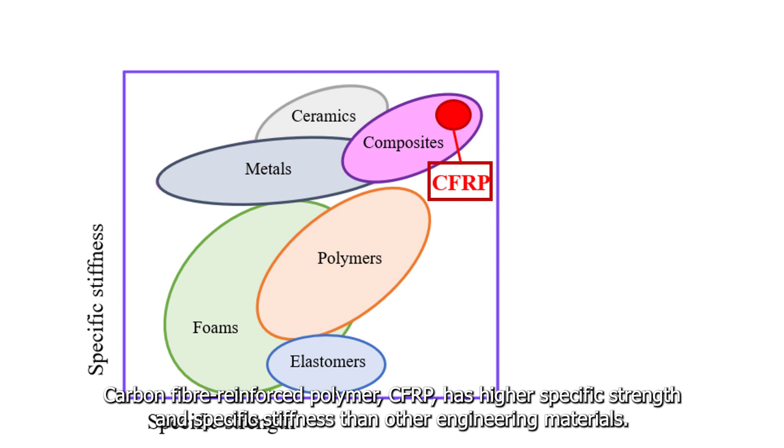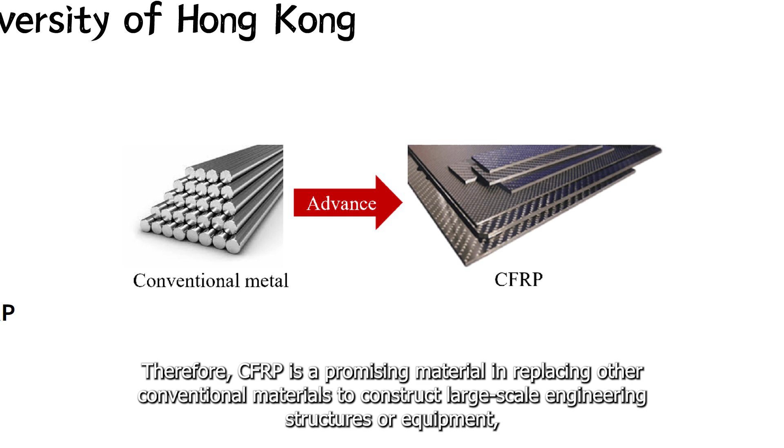Carbon fiber reinforced polymer (CFRP) has higher specific strength and specific stiffness than other engineering materials. Therefore, CFRP is a promising material for replacing conventional materials in constructing large-scale engineering structures or equipment, increasing the working efficiency of the whole system.

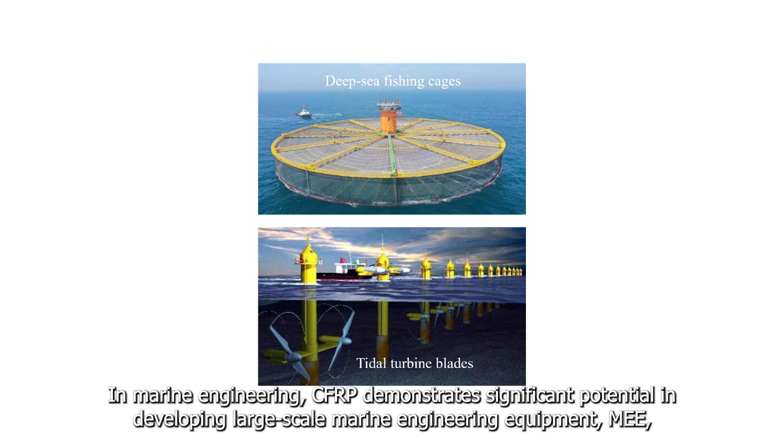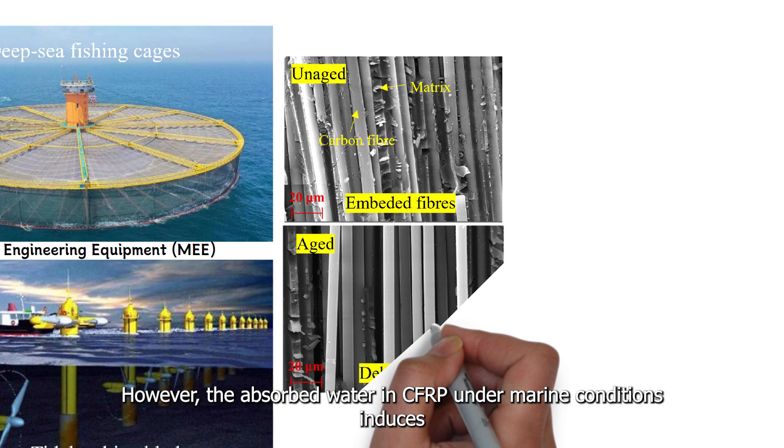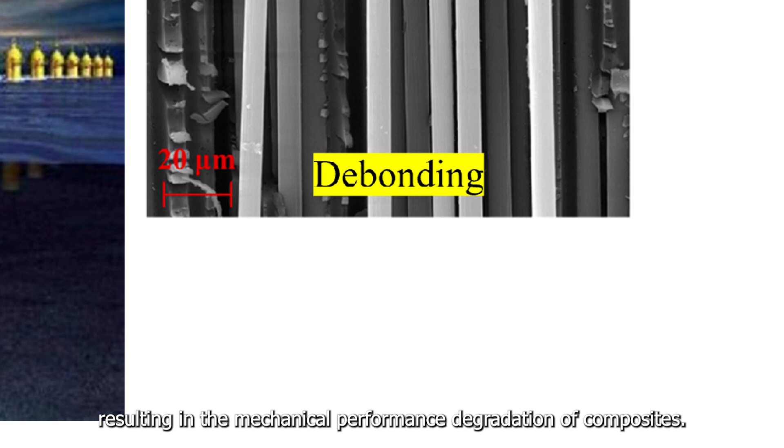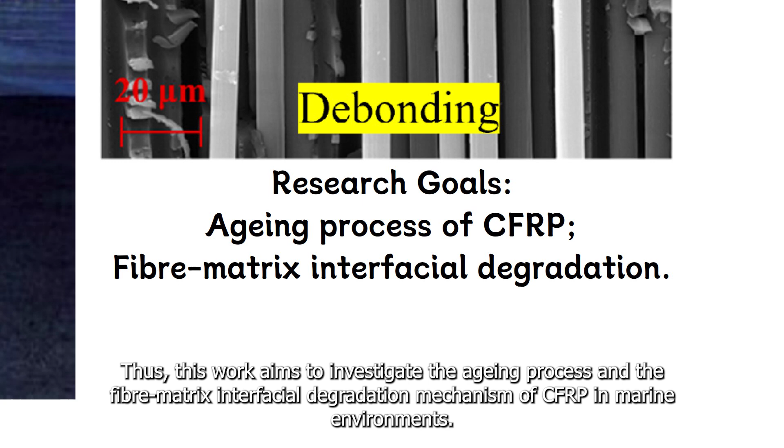In marine engineering, CFRP demonstrates significant potential in developing large-scale marine engineering equipment (MEE), such as deep-sea fishing cages and tidal turbine blades. However, absorbed water in CFRP under marine conditions induces interfacial debonding between carbon fibers and the resin matrix, resulting in mechanical performance degradation of composites. Thus, this work aims to investigate the aging process and the fibre-matrix interfacial degradation mechanism of CFRP in marine environments.

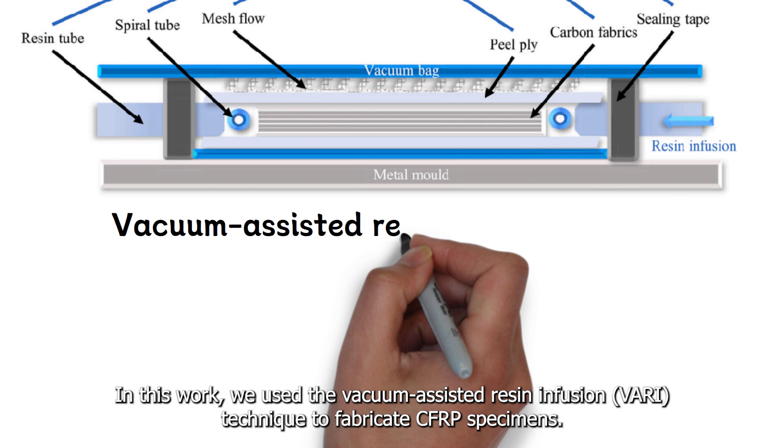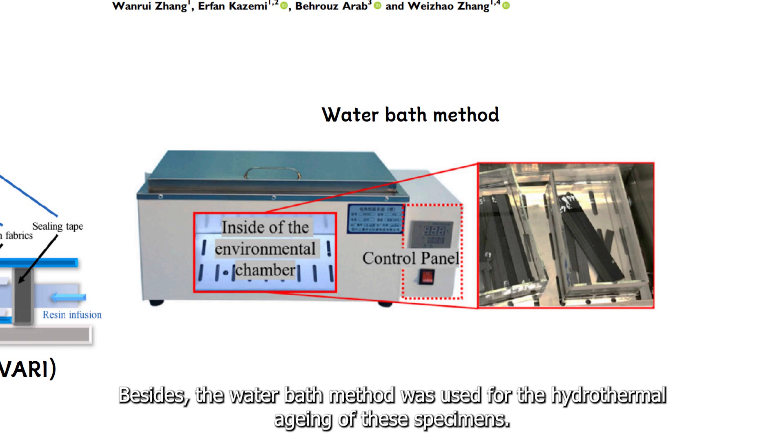Firstly, experimental investigations were conducted on the mechanical performance degradation of CFRP under artificial marine conditions. In this work, we used the vacuum-assisted resin infusion (VARI) technique to fabricate CFRP specimens. The water bath method was used for hydrothermal aging of these specimens. ASTM-based tests were also conducted for unaged and aged specimens, including tensile, compressive, and shear tests.

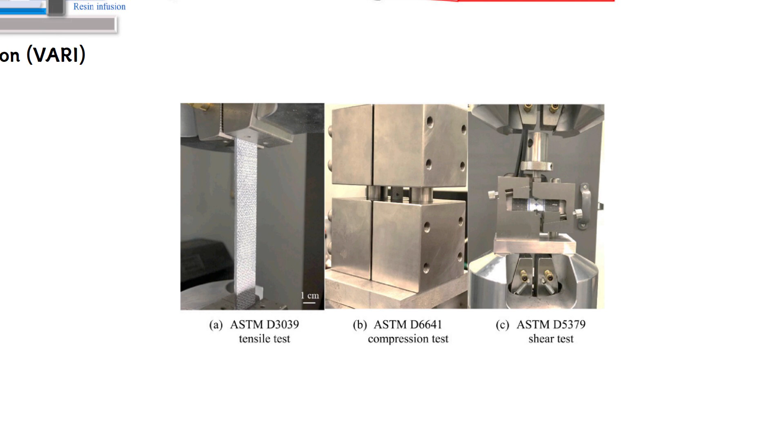It was found that the mechanical degradation of fiber-dominated properties is limited, while the aging of non-fiber dominated properties is much more obvious.

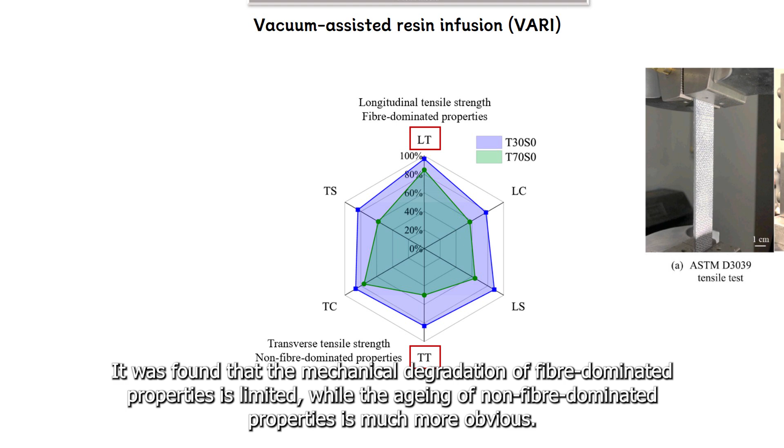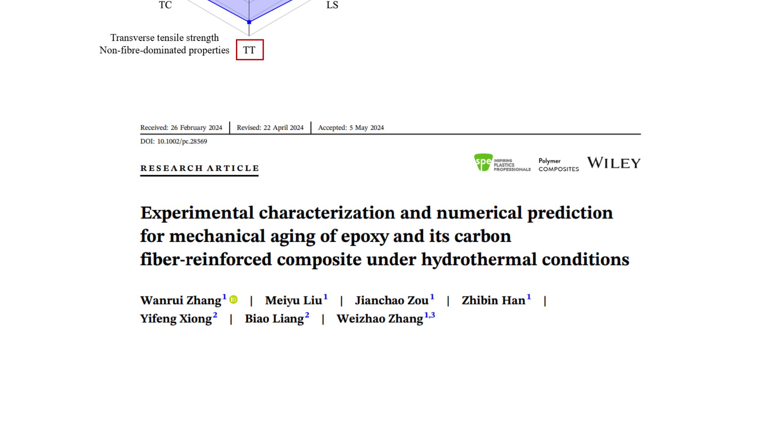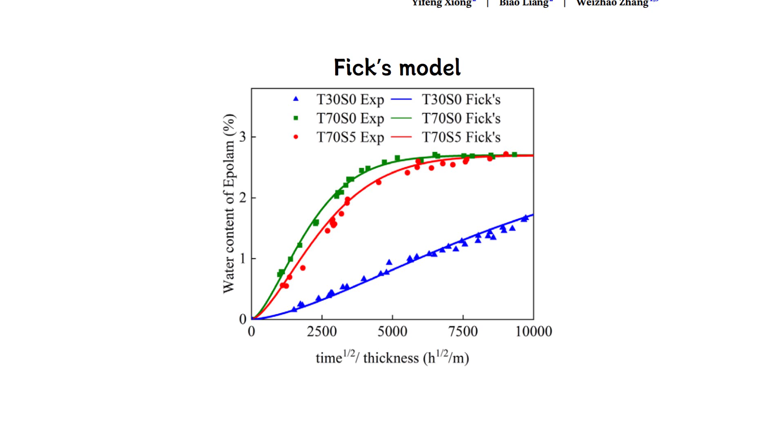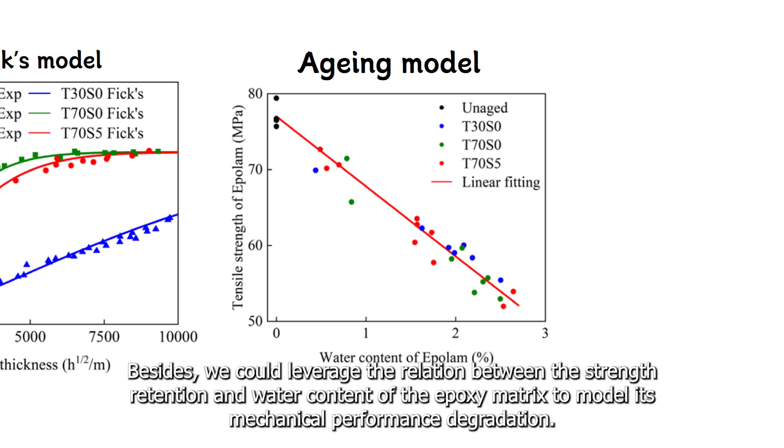Subsequently, we investigated the aging of the resin matrix using an experimental-modeling combined method. It was found that the Fick's model could capture the water absorption behavior of the epoxy matrix under different hydrothermal conditions. We could also leverage the relation between strength retention and water content of the epoxy matrix to model its mechanical performance degradation. We also established an elastoplastic constitutive model to simulate the mechanical response of the epoxy matrix.

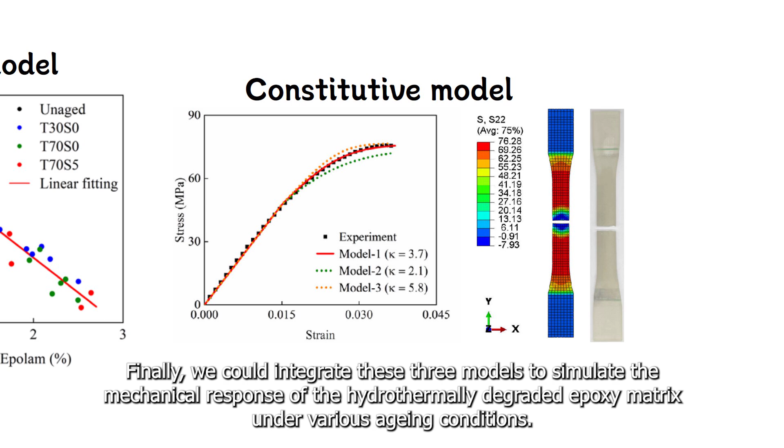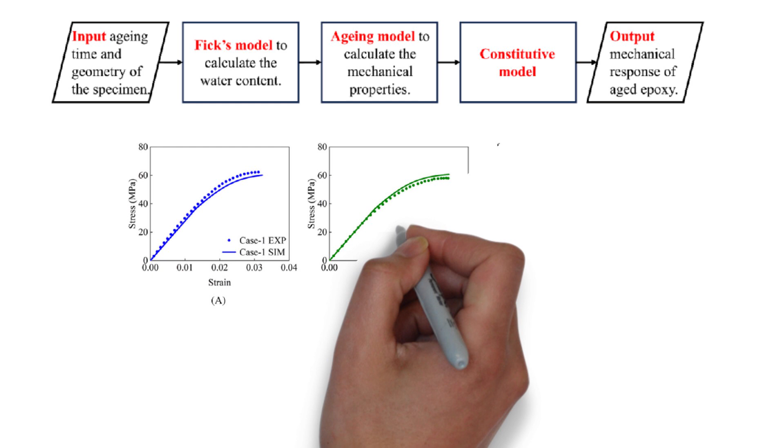Finally, we integrated these three models to simulate the mechanical response of the hydrothermally degraded epoxy matrix under various aging conditions. Therefore, we established a numerical modeling method to simulate matrix aging and help analyze the fibre-matrix interfacial degradation.

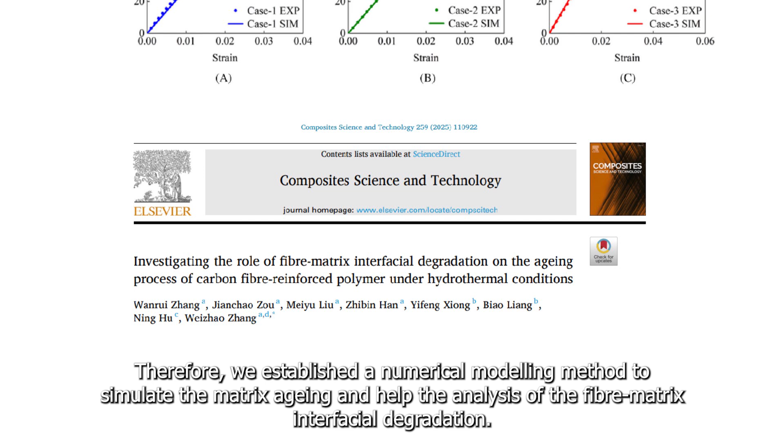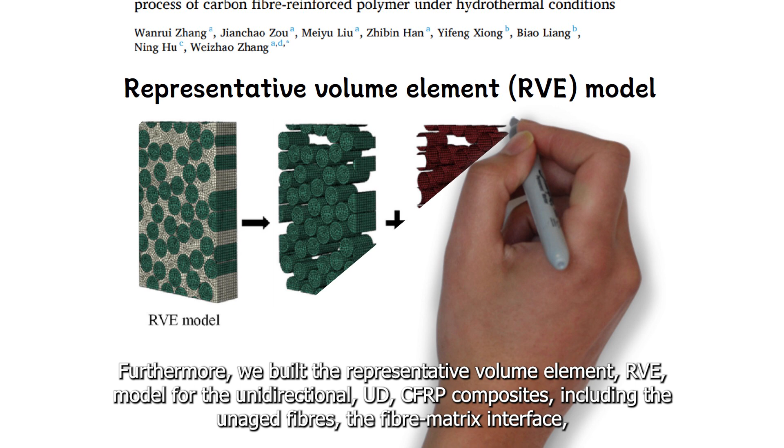Furthermore, we built a representative volume element (RVE) model for unidirectional UD CFRP composites, including the unaged fibers, the fiber-matrix interface, and the matrix with mechanical properties simulated using the established modeling method.

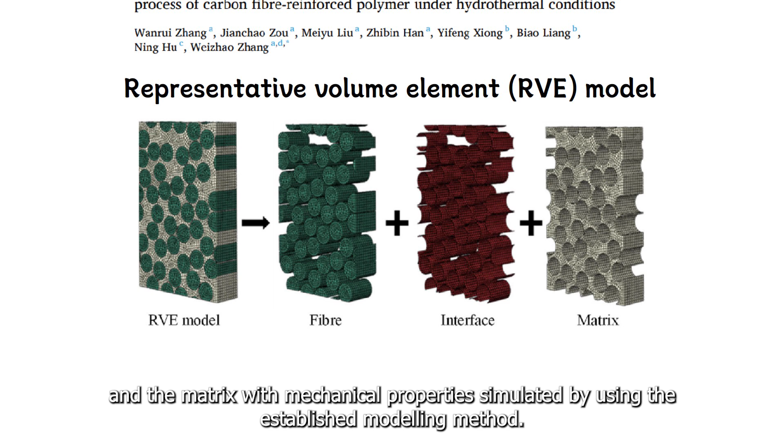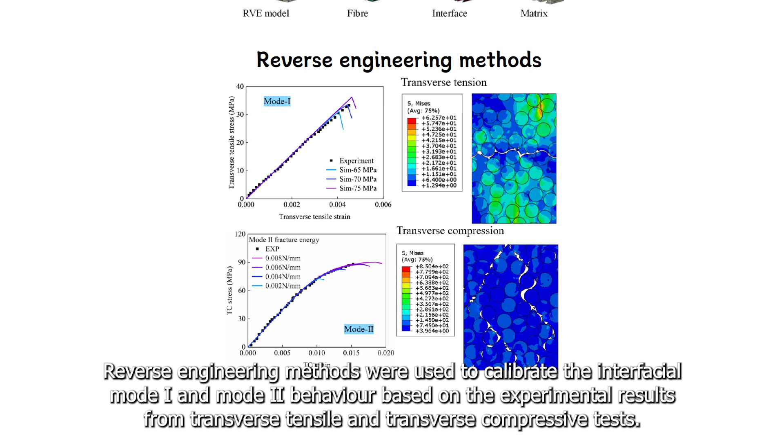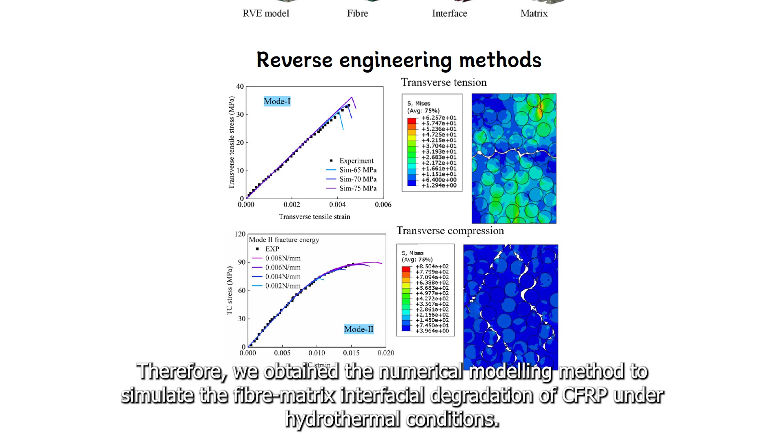Reverse engineering methods were used to calibrate the interfacial mode 1 and mode 2 behavior based on experimental results from transverse tensile and transverse compressive tests. Therefore, we obtained a numerical modeling method to simulate the fiber-matrix interfacial degradation of CFRP under hydrothermal conditions.

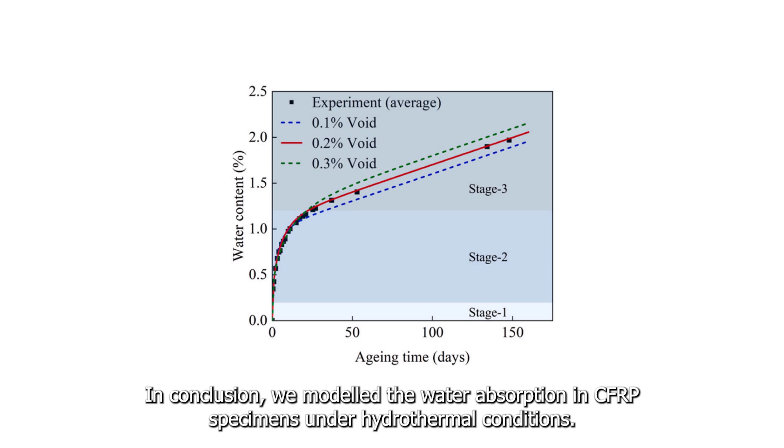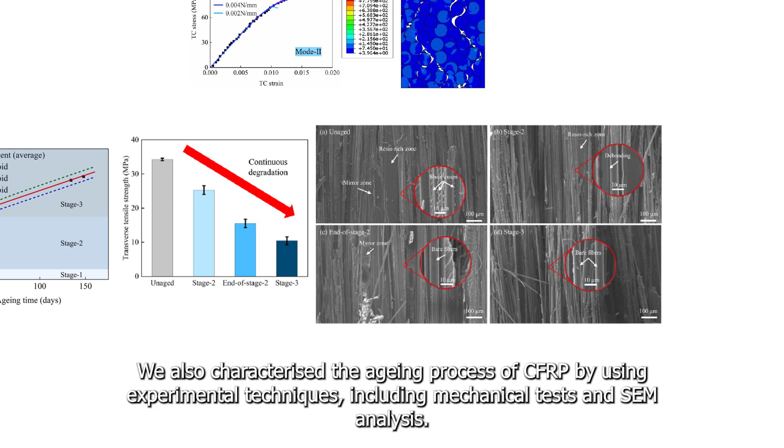In conclusion, we modeled the water absorption in CFRP specimens under hydrothermal conditions. We also characterized the aging process of CFRP using experimental techniques, including mechanical tests and SEM analysis. Therefore, a three-stage degradation process was established to reveal the aging mechanism of CFRP under aqueous exposure.

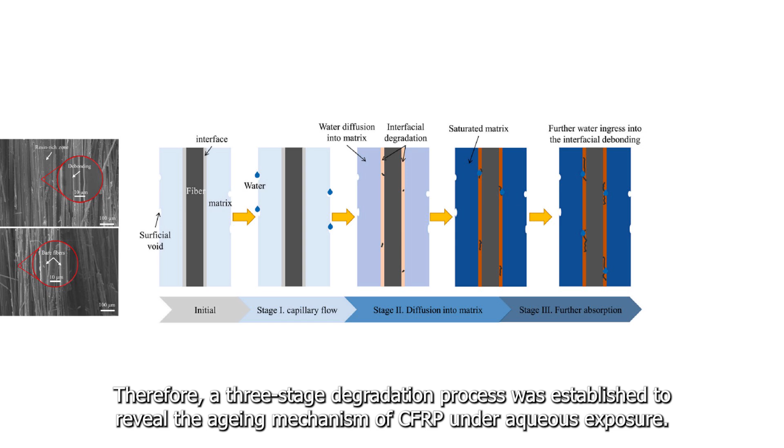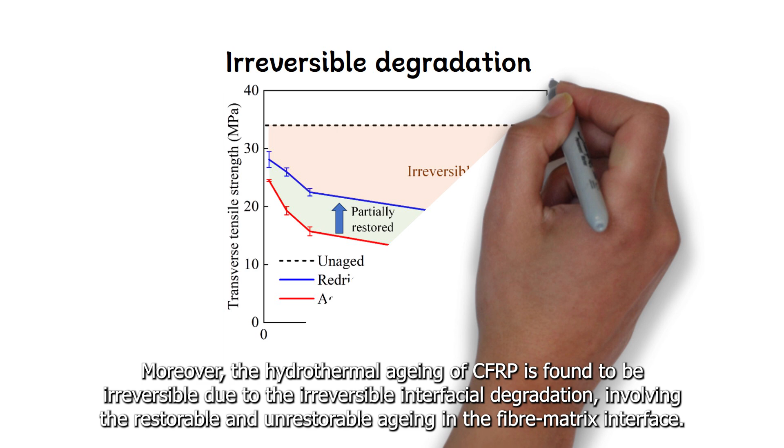Moreover, the hydrothermal aging of CFRP is found to be irreversible due to irreversible interfacial degradation, involving both restorable and unrestorable aging in the fibre-matrix interface.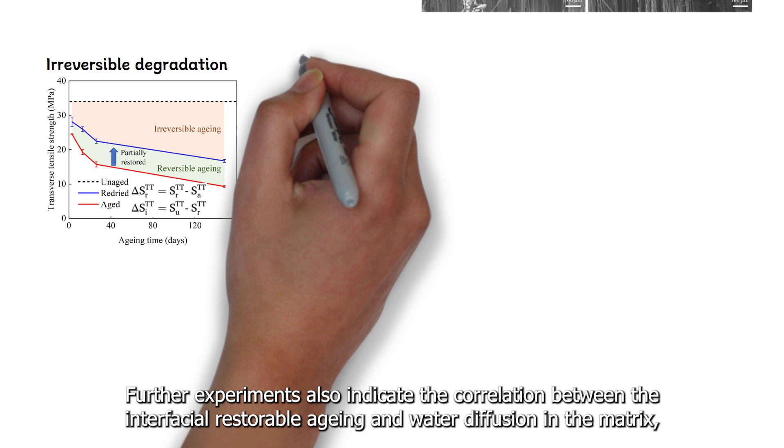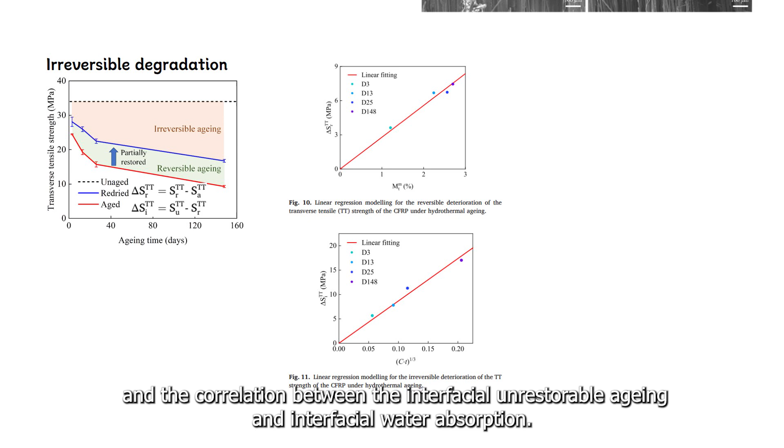Further experiments also indicate the correlation between the interfacial restorable aging and the water diffusion in the matrix, and the correlation between the interfacial unrestorable aging and the interfacial water absorption.

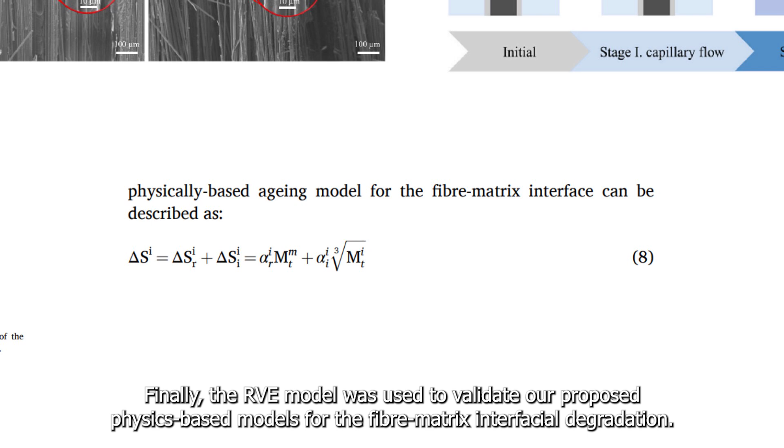Physics-based models were subsequently derived from the above experimental characterization. Finally, the RVE model was used to validate our proposed physics-based models for the fibre-matrix interfacial degradation.

The current research outcomes included three published papers on this research topic.